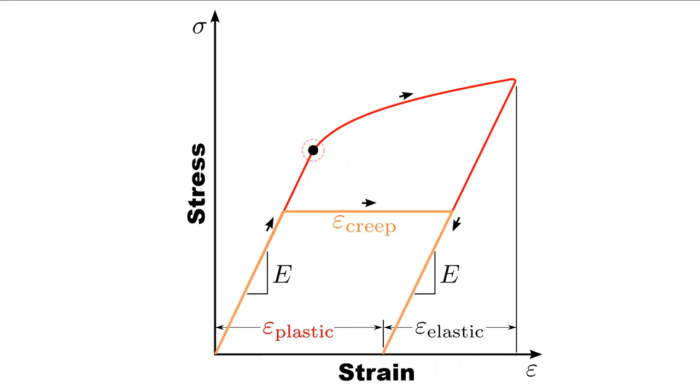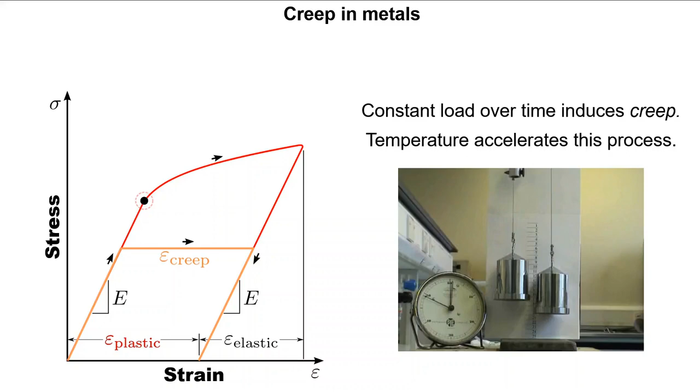This creep deformation only needs a load and time to occur. However, temperature really speeds this up, and it can even occur at room temperature. You'll have to take my word for it, but both of these wires are made of the same material and are loaded well below their yield strength. One is significantly longer. The end of it is roughly out of frame.

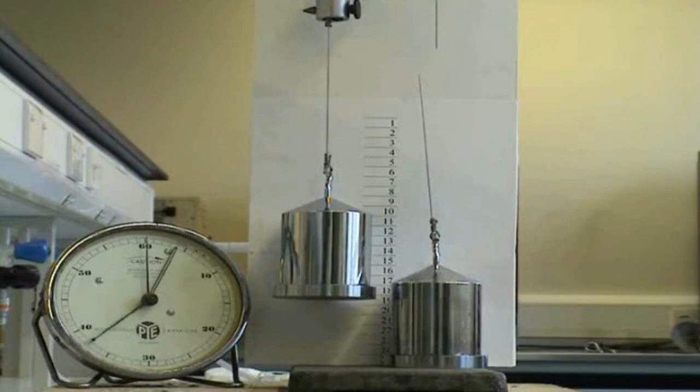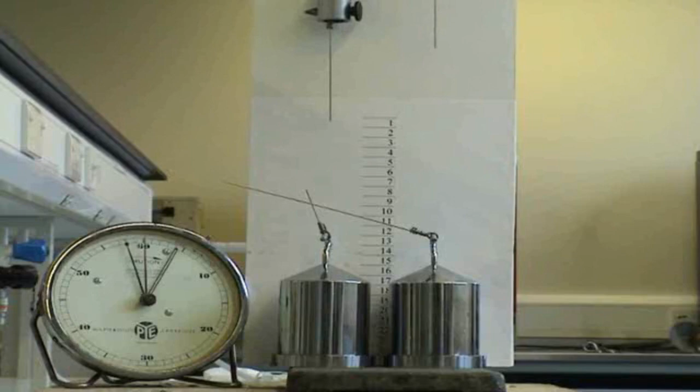As you can see, the long one fails or ruptures before the short one, but they both elongated significantly before failure. This elongation was creep strain, and it occurred at room temperature. You might have also observed that the rate of deformation, that is, how fast the weights are moving, seems to accelerate as the wires finally rupture.

Attempting to show creep strain on a stress versus strain plot doesn't really demonstrate the effect of time. Creep effects are typically communicated with the rate of creep strain accumulated as a result of time. For temperatures that are below a particular point, creep doesn't really do that much. At temperatures below 40% of the melting temperature of the overall metal, there really isn't any creep strain that accumulates, at least perceptibly, over extremely long periods of time.

Polymers also have this threshold temperature of 40% of their melting temperature, and for ceramics it can be up to 60%. Creep curves have characteristics that all look the same, but the conditions that escalate the creep rate, that is, the change in the creep strain with time, are either an increase in the static load for a given temperature or an elevated temperature for a given load.

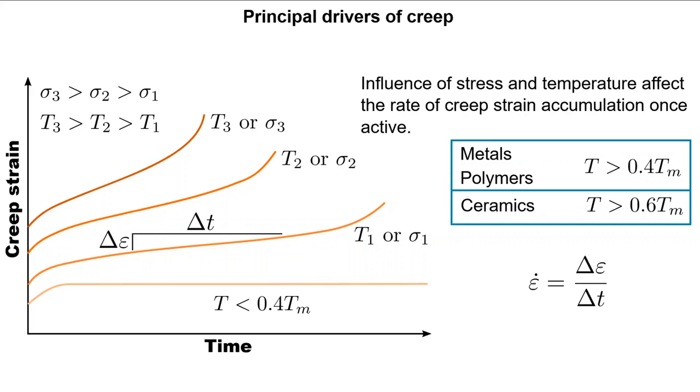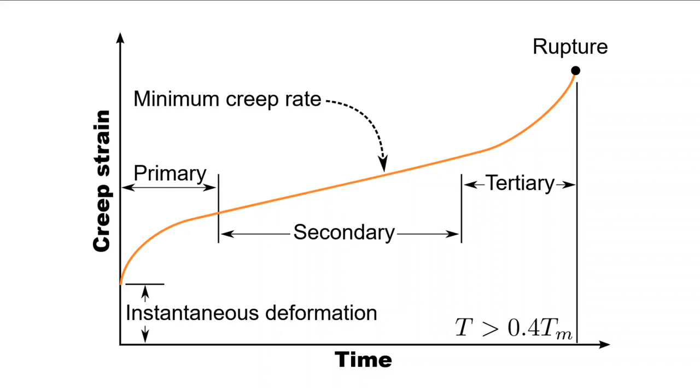When the temperature is above 40% of the melting point of a material, a characteristic curve looks like this, where there is first an instantaneous deformation, which then leads to primary creep, where the rate increases fairly rapidly until hitting a steady increase in the secondary region. The secondary region is where the slowest rate of creep accumulation occurs, and this is where materials that are subjected to creep conditions reside. After this, tertiary creep starts to take place and the rate increases again to rupture.

Titanium, nickel, and steels and their alloys are used in high temperature applications. It can clearly be seen why. Their melting points are very high. However, lead and tin's melting points are quite low. Tin melts at approximately 200 degrees Celsius, meaning that alloys featuring these lower melting point metals are in the creep regime at room temperature. That explains why creep was demonstrated in the two wires shown previously, but it doesn't explain why there was a size effect observed. The longer wire ruptured before the short wire.

I'll get into why in a minute, but for a representative creep test, we can come up with an empirical relationship which describes the minimum creep rate. Like we have seen previously regarding other elevated temperature phenomena such as diffusion, the creep rate is captured with an expression that looks like this. Here, Q, K, and N are coefficients which describe the material system. Both higher temperatures and stresses will exponentially increase the creep rate. Let's see how with a genuine material system that is employed for conditions that nominally see very high temperatures.

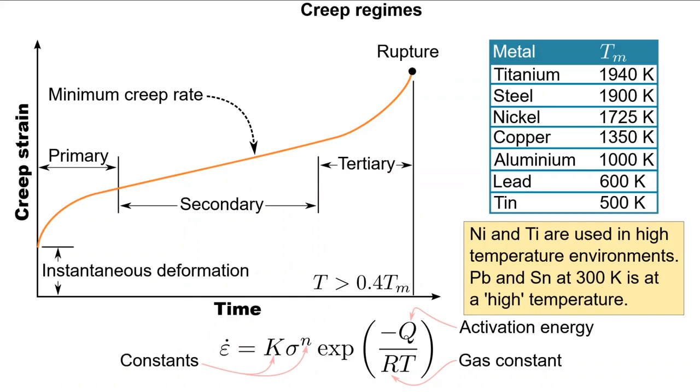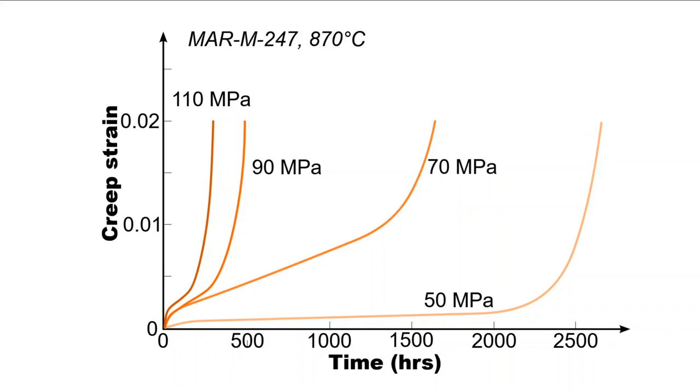Here are realistic creep curves for MAR-M247, a nickel-based superalloy that's employed in stationary gas turbines. At 870 degrees Celsius the creep behavior is observed to change dramatically. There is a 5-fold decrease in the amount of time required to rupture the component if the load is doubled. The other point of observation is there does not need to be very much strain before rupture, only 2%. Let's look at why.

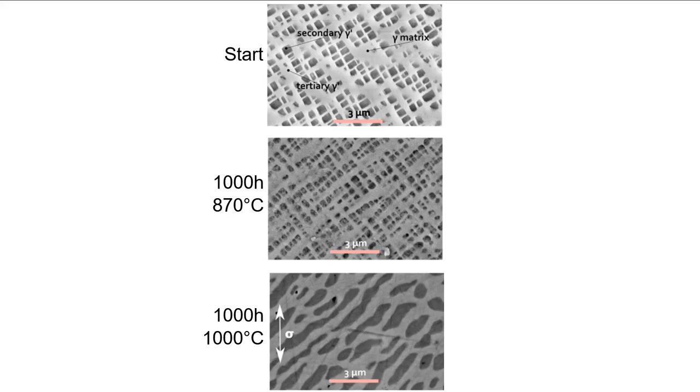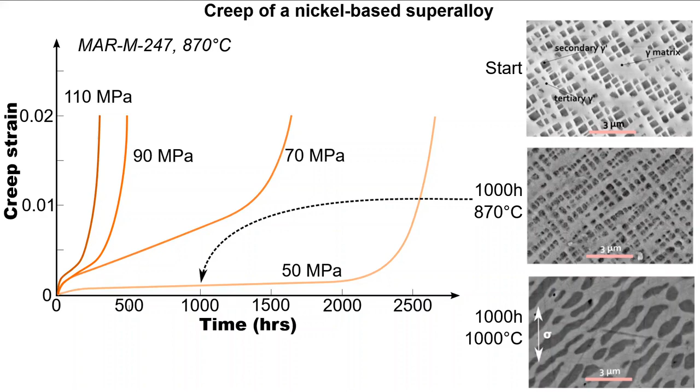This is a phenomenon which pertains to nickel-based superalloys. At high enough temperatures, diffusion allows the material to start rafting, or developing a texture aligned with the loading direction. It's not surprising that the microstructure doesn't change significantly at 870 degrees Celsius for 1,000 hours. This is actually the least aggressive creep condition described. However, there is some creep deformation that is accumulated. Let's get into the process by which this occurs.

As a bit of review, you'll recall from our covering temperature effects, diffusion is the main transport mechanism. Atoms move counter to vacancies, driven by concentration gradients, and the formation of new vacancies as temperatures increase. Furthermore, if you recall, one of our barriers to dislocations are interstitial or substitutional atoms, which can reside at the core of dislocations, as I've demonstrated here for an edge dislocation. As diffusion rates start to exponentially increase with temperature, barriers to dislocations also start to diminish.

Reviewing the strengthening mechanisms in metals and thinking about how elevated temperatures can affect them, it can be recognized that recovery processes can take place and therefore strain hardening and precipitation is affected because the precipitates age further and coarsen. Phase stability is usually unaffected by creep conditions, unless entering a tempering regime. Grain boundary and solid solution strengthening are affected, but this is less clear as to why.

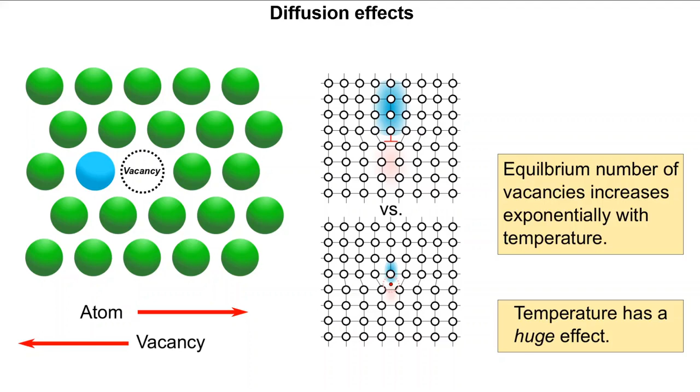Well, at elevated temperatures, the additional vacancies being added start to allow new directions for dislocations to move. Here I'm showing an edge dislocation that is effectively pinned from moving in the standard way by a substitutional alloying atom. At room temperature, this dislocation could not move, regardless of there being a vacancy nearby. At elevated temperatures, the vacancy, or an atom, depending on how you look at it, is free to move to the immediacy of the pinning atom.

The result is that this will enable the dislocation to climb away from the solid solution atom. The result of which is that the dislocation now requires less shear to move, as it is free of the effects of the pinning atom. Now imagine this going on a few trillion times, and we have a complete picture as to how large-scale deformation can occur at temperature with relatively low loads.

The role of vacancies either moving or being generated at higher temperatures also explains why grain boundary strengthening diminishes at elevated temperatures for polycrystalline materials. These are naturally spots which contain a large number of vacancies due to the misorientation in the originating solidification event. Therefore, materials which contain a large number of grain boundaries will be particularly susceptible to creep. And this also explains the behavior of the long wire versus the short wire demonstrated earlier. On a cross-sectional basis, both wires will have roughly the same number of grain boundaries, but over their lengths, there are significantly more grain boundaries on one versus the other.

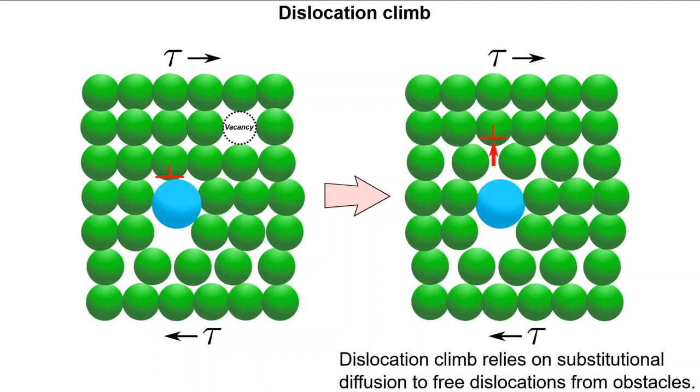So, to review, creep is a time-dependent deformation of a material, and it may occur under static loads which are well below the yield stress. We have looked at how creep is aggravated by both increased temperatures and stresses. The secondary creep regime is where the minimum creep rate occurs. Creep is generally only of concern when the material temperature is above 0.4 of the melting point temperature, or 40%, as dislocation climb relies on diffusion and the presence of vacancies in the lattice.

Atoms at the core of a dislocation can move to nearby vacant sites, which effectively allows the dislocation to move by climb. In this way, dislocations can free themselves from a pinning obstacle and move under the influence of the applied stress. Dislocation climb can only occur if there are enough vacancies in the lattice. During creep, dislocations go through a continuous process of climbing, gliding, becoming pinned again, and then climbing free. The dislocation climb process relies on substitutional diffusion in order to free dislocations from obstacles. The higher number of vacancies occurring at grain boundaries explains why fine-grained materials are more susceptible to creep.

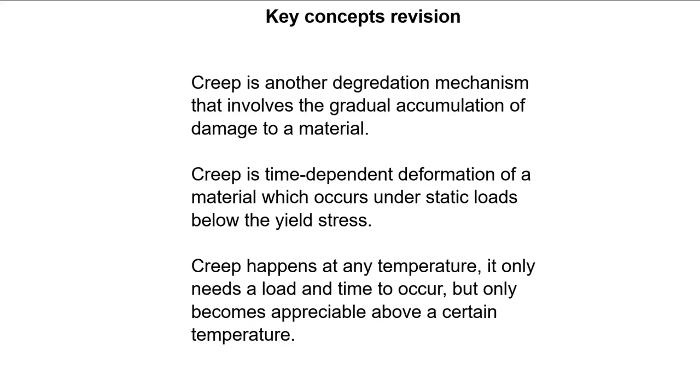That about covers it for creep at this stage, and it is a very important aspect of material science, as it does limit a large number of thermal conversion applications. The higher the temperature you can operate a material, the better efficiencies you can obtain over longer periods of time.